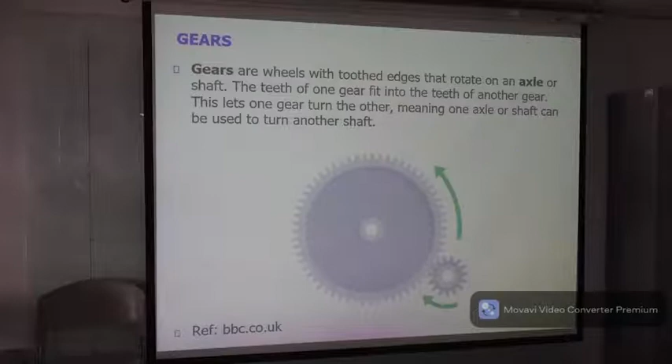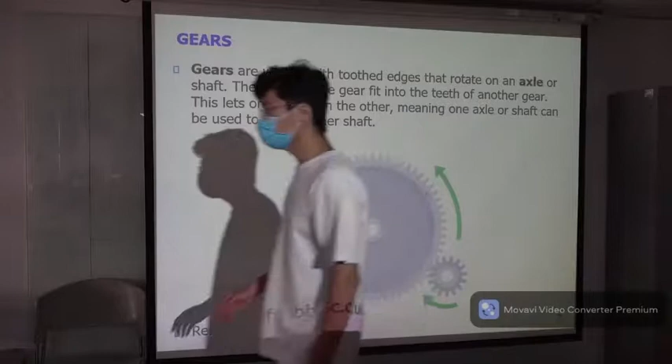Could you please read this? Gears are wheels with toothed edges that rotate on an axle or shaft. The teeth of one gear fit into the teeth of another gear. This lets one gear turn the other, meaning one axle or shaft can be used to turn another shaft.

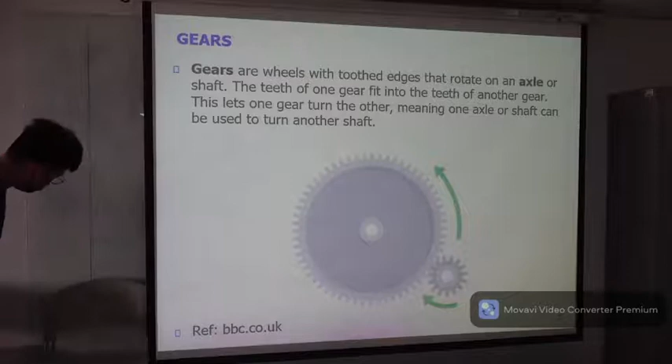Okay, gentlemen, what's the rotation direction of the big gear? Clockwise or counterclockwise? The big one is counterclockwise. And the smaller one is clockwise. Okay, yes, they are in opposite direction.

Lady, did you see the rotational direction of the gears? The green arrow shows the rotation. And are they in the same direction? No. Okay, next page, please.

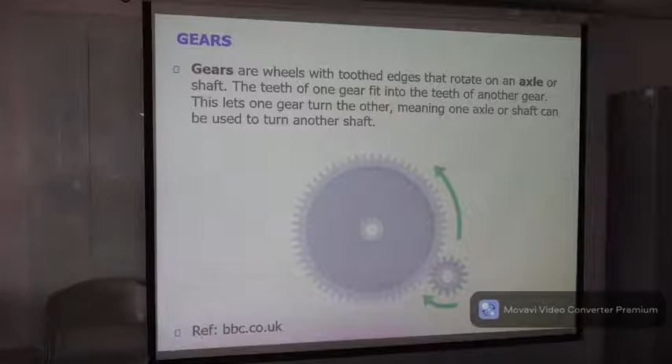Similar case is the gear transmission system - the bike. So we have a sprocket, two sprockets. They are not gears, and they rotate in the same direction.

Could you read the first point? The force acting on the teeth is identical for both gears. but their moments are different. Moments equal to force times radius.

Like if we join hands together, yes. If I pull this gentleman, do I feel the same reaction force from him? Do we feel the same force, my hand and his hand? Yes, thank you. The same as the sprocket - they experience the same force.

Could you stand up, please? So if her joint is the supporting point and you extend your arm - just one hand - so if I push a force, this is F, and this is the arm of her length. So I apply a torque to her joint. The torque is the force times the length of her arm.

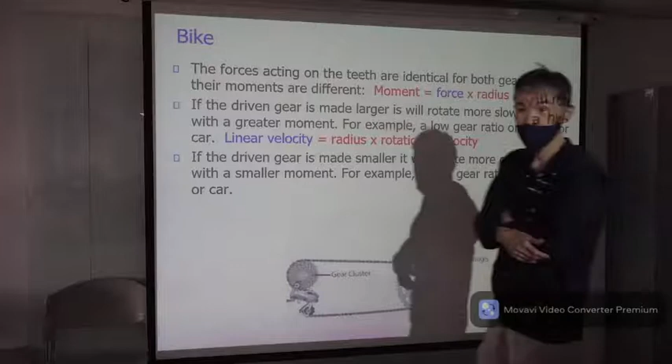Okay, sweet lady, do you follow me? The linear velocity equals radius times rotational velocity. Do you understand? Can you say that again? The linear velocity equals radius times rotational velocity. Do you follow? No.

Yeah, it's like - here is a pendulum. If I rotate the pendulum, there's a linear velocity, it will go right and left, but the angle will change. So the angle change times the length of the pendulum equals the linear velocity. v equals r times the angle change with respect to time. So the velocity of this point equals the rotational velocity times the rotational length, the radius.

Yeah, just the linear velocity - the linear velocity, the tangential velocity. Yes.

Okay, could you read the third point? If the driven gear is made smaller, it will rotate more quickly, but with a smaller moment. For example, a high gear ratio on a bike or car. The point is because linear velocity is the same for the small gear and the large gear.

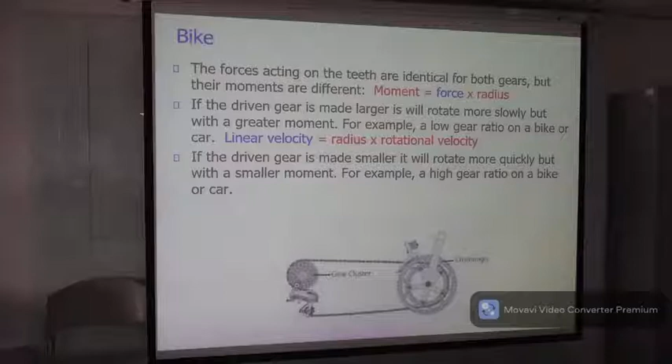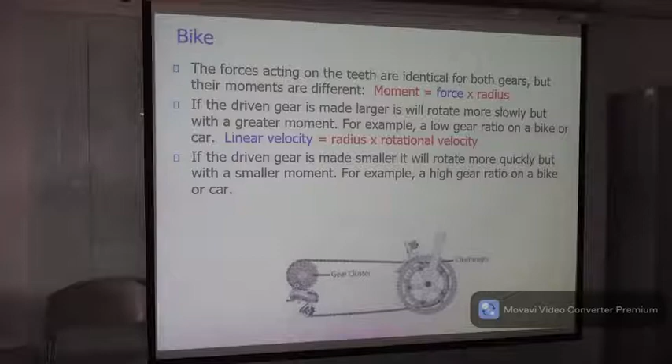So we start this week by this simple physics. Then it's like give us a good look into the future of this week.

Right, so everything is logical. Yes, it's reasonable. So we really like logic. If everyone could follow the logic, isn't it a very beautiful world? Yeah, that would be ideal. Ideal world, yes, very good world. So let's try to follow the logic. Okay, I like it, logic.

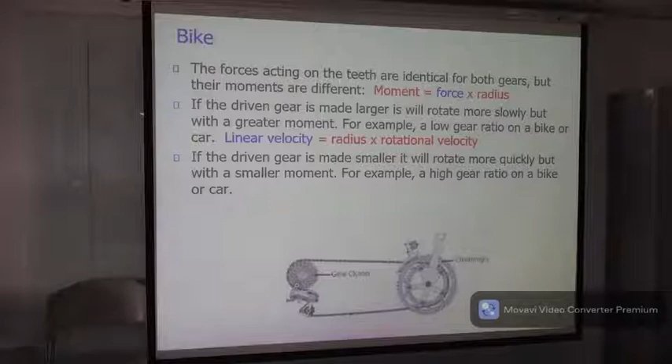Okay, do you get all the points? Oh yeah, yeah. So are you happy with it? Oh yeah. Next page, please.

So now we have an example. Could you read this example, please? Okay, a gear with a radius of 0.1 meter is turned by a gear with a radius of 0.05 meter. The moment of the smaller gear is 20 Newton meter. Calculate the moment of the larger gear.

We know the moment equals the radius times the force. They experience the same force. For the small gear, you can calculate the force applied to the small gear. But you know the force applied to the large gear is the same force, so after that you can get the force of the large gear. The problem also gives you the radius of the large gear, so you can calculate the moment of the large gear. So do you follow this logic, this thinking logic?

Yes. Okay, good. So now, everyone, please get a pen and paper or your smart pad, anything, and just calculate the moment of the large gear, please. If you can just use your mind, you don't need a pen or paper, smart pad, notepad, iPad, whatever. It's okay, good, yeah, you can just use your mind to do your brainstorming.

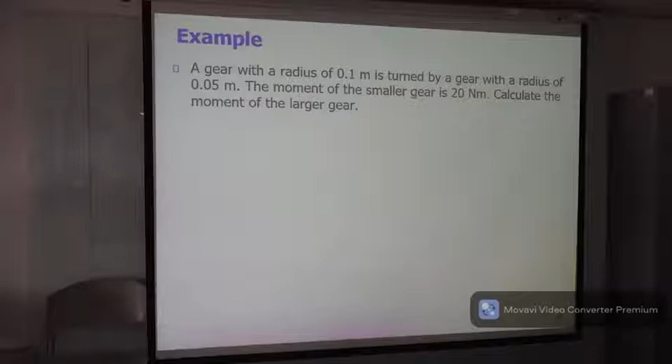Okay, please turn to the next page. Here is the answer. Do you get it? Do you get the answer right? 40 Newton meter. Yes.

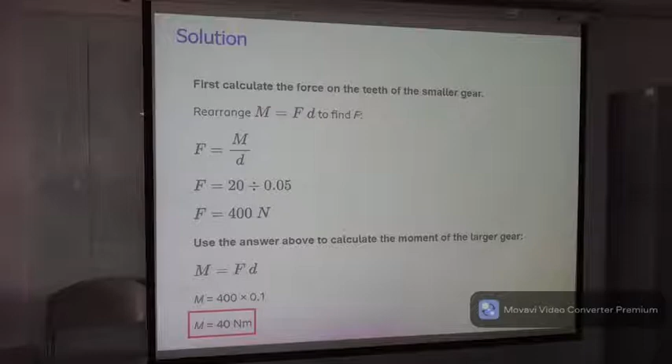For physics, we always like to have the number with the unit. So we like to have you say 40 Newton meter as the answer. Otherwise, if it is Newton centimeter, then the answer could be 4,000 Newton centimeter. So that's why I'd like you to also remember the answer should include not only the number, but also the unit. So do you get it? Very good, excellent.

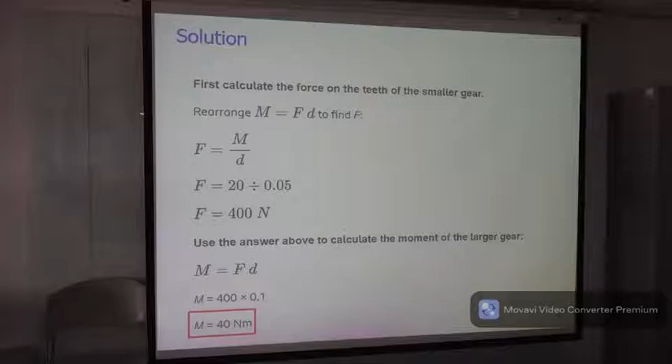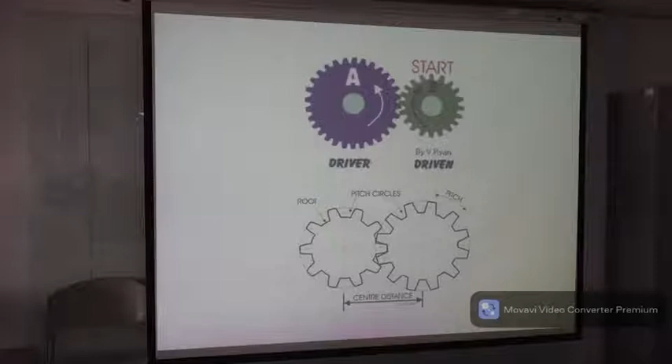Okay, next page please. Now we have the driver gear rotate in the, what's the direction of the driver gear? Clockwise or counterclockwise? Counterclockwise, yes. And what's the rotation of the driven gear? Clockwise. Right, good.

So we have a schematic plot for two gears, the bottom figure, the lower figure. So did you see the two gears? Then did you see the green color circle and red color circle? We call the green color circle the pitch circle. For the two gears, their pitch circles should be tangent to each other. And the pitch is the distance between two gears, pitch.

And the center distance, you know, is very straightforward. So do you get the nomenclature right? Do you understand all the nomenclature, all the terminology? Good, great.

So let me ask one gentleman. What's your name, please? Aaron. Aaron. So what's the pitch? From the distance from one gear to the other, the circumferential distance between two gears. Circumferential, the arc. Okay, what's your major?

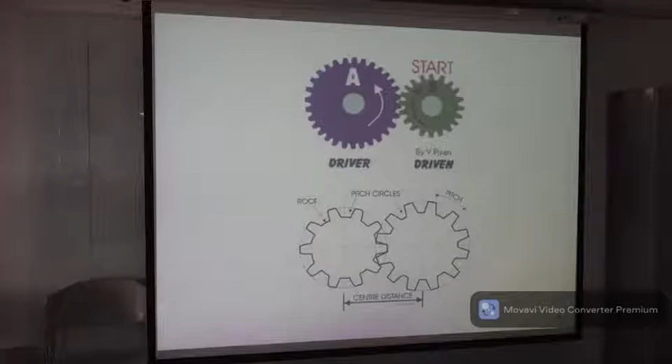Veteran. 兽医。 Huh? 兽医怎么念？ Oh, veteran. Vegetarian. That sounds right. Okay. Yeah, so you are a smart guy. Why? You should be. You are going to be an animal doctor. No? Okay, fine. Next page, please. Next page.

Okay, some introduction to gear. So, if the large gear has 24 teeth and small gear has 8 teeth, we call this a 3-to-1 ratio. So, could you read the point? Teeth number of driving gear divided by teeth number of driven gear, we call gear ratio. So if you see this symbol, this is number. Number. Okay. Shorthand writing.

Okay. So driven gear: 3 turns moves by 24 teeth, 1 turn moves by 24 teeth. For the small gear, it's 8 teeth, so 3 turns equal to 24 teeth. For the large gear, it has 24 teeth, so 1 turn moves by 24 teeth. Do you get it? Yes. They should move with the same number of teeth, because their pitch are the same. For the small gear and the large gear, they have the same pitch. So that's why small gear should rotate 3 turns, and the large gear only rotate 1 turn. Isn't that beautiful? Yes, it's very beautiful.

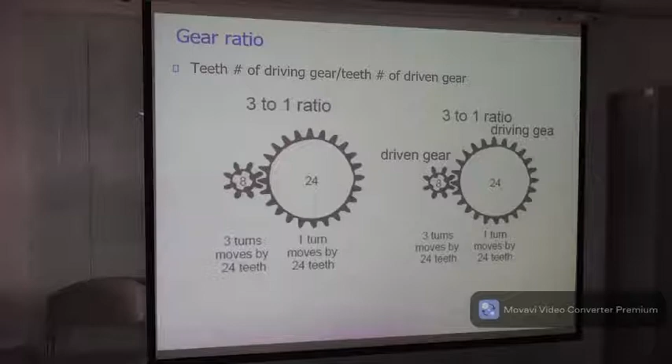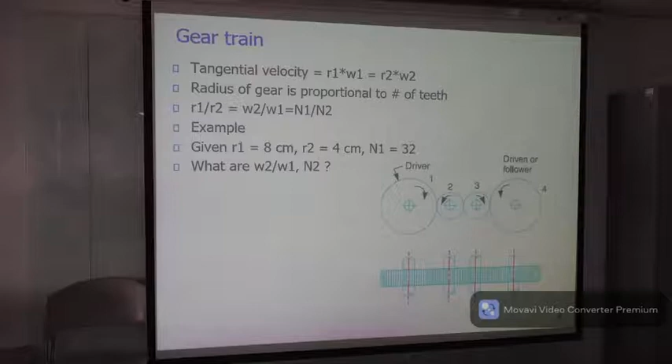No, but I want to know what does W mean. W is the radius of the gear. So, but R, oh, sorry. W2 is the velocity, and R is the radius. Okay. So, radius ratio equal to the inverse of the rotational speed ratio. R1 divided by R2 is 2. So this is 2 and this is 16. Yes. Okay. Next page, please.

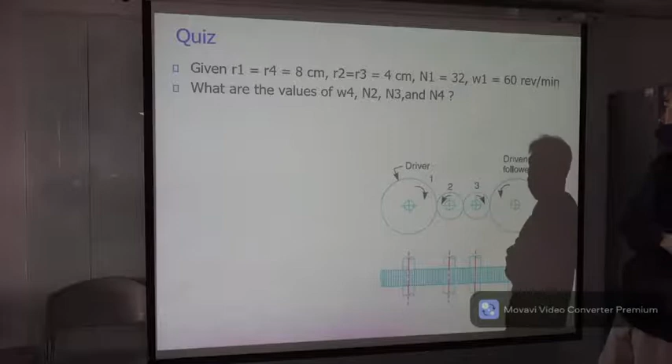Now, another quiz. So please do the quiz, everyone. W1 equal to 60 revolutions per minute. 60 revolutions means 60 turns. And 1 minute is 60 seconds. So revolutions means turns.

Very good. We almost got all students in the classroom. We got 22 students in the classroom, and the registration number is 24. So we only have 2 students absent from the class.

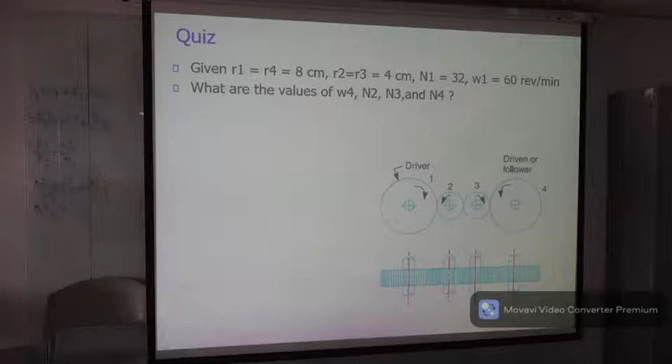60. Okay. So raise your hand if you have problem getting the answer. Okay. Everyone got it right. Next page, please.

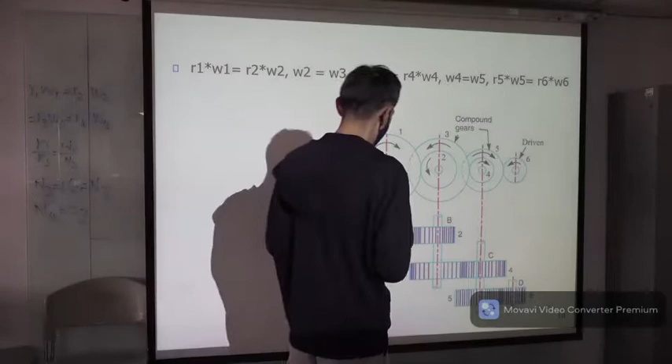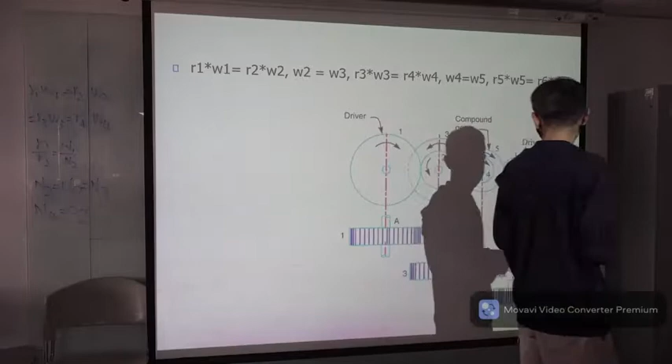Okay, so here we have some gears arranged in this way. We have driver, we have driven, and we have two gears between the driver and the driven gear. And we have the relation. So because R1 and R2 contact with each other, we have R1 omega 1 equal to R2 W2.

And R2 and R3, they are attached to each other. They are in one assembly, gear 2 and gear 3. See, they are bound to each other. So they got to have the same rotational speed. That's why we write W2 equal to W3. And gears 3 and 4 contact with each other. So we have R3 W3 equal to R4 W4.

But gear 4 and 5, they are in the same assembly. They are bound to each other. So that's why W4 equal to W5. And gear 5 and 6, they contact with each other. So we can write down R5 W5 equal to R6 W6. Right? Yes. Okay. Do you follow this? Do you have problem with this figure? No. Okay. Next page, please.

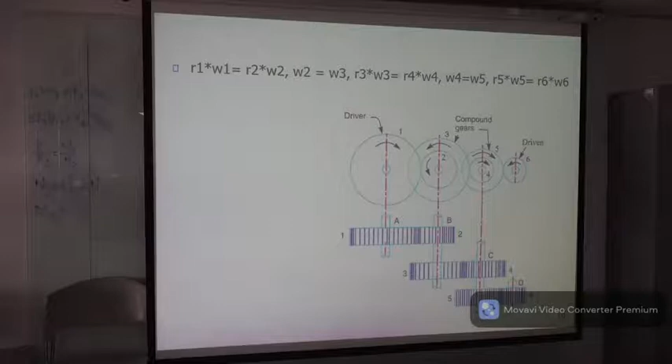So now we have a quiz for you to practice. Please calculate W6, the rotational speed of gear 6, given the condition. RPM means revolutions per minute.

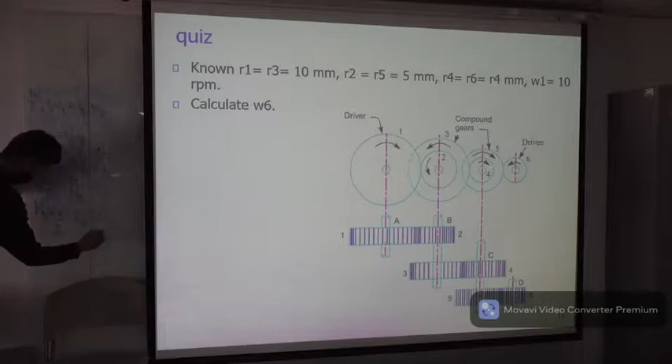So 10 times 10, 100, divided by 5 equal to 20. W2 is 20, W3 is the same, 20. Then if W3 is 20, W4 should be 50. W5 is 50. So 250 divided by 4 is 62.5 RPM. Okay?

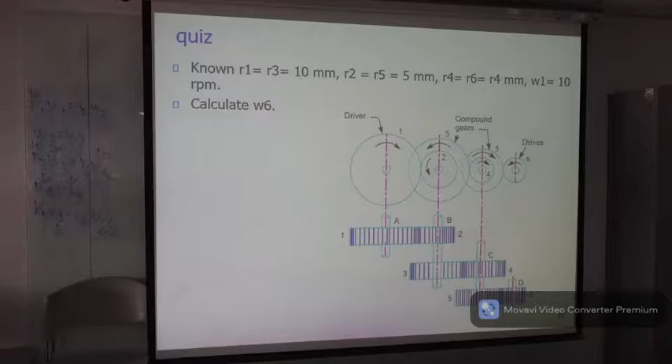Okay, so now do you understand why? Yes. It's 62.5 RPM. Next page, please. Okay,

We have a term, module, for gear designers. We have module 1, module 2, module 3. It's the name for gear designers, because pi times module equals P. P is in millimeters, and there's a correspondence between P and M. P is the pitch.

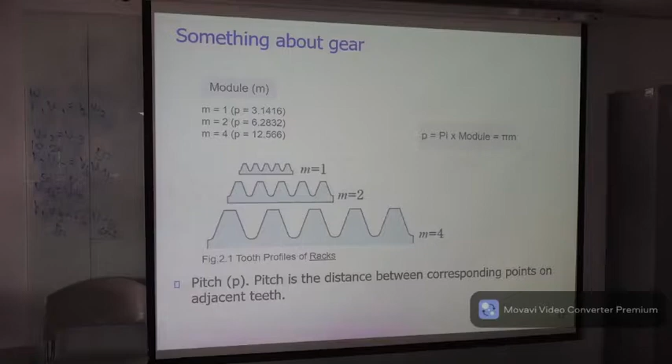So if you design a gear with pitch equal to 3.1416 millimeters, then we call the gear a module 1 gear. It's just something for gear designers to communicate with each other. Okay, so could you read the bottom point? Pitch. Pitch is the distance between corresponding points on adjacent teeth. Right. Okay. Next page, please.

So besides module, another term for gear designers to use is diametral pitch. The relation between module and diametral pitch follows the equation: module equals 25.4 divided by diametral pitch. Okay, just something for you to know. Okay, next page, please.

Okay, we have another schematic for a gear. So we have a gear, and the pressure angle is at the contact point. We draw a vertical line, and along the surface of the gear, we draw another line. The angle between these two lines we call the pressure angle. And we have the pitch, the distance between the corresponding points on the two adjacent teeth. And the angle between the surface line and the vertical line is the pressure angle. Could you read the point?

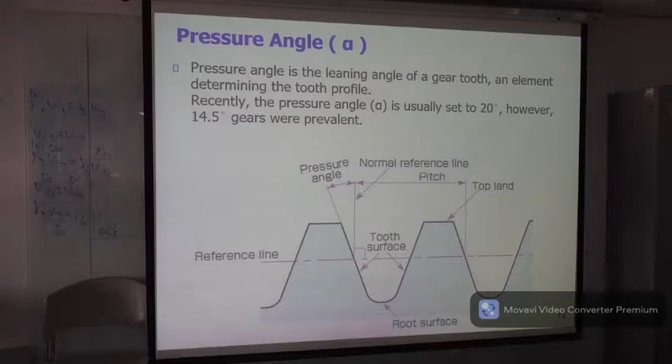The first point? Pressure angle is the leaning angle of a gear tooth, an element determining the tooth profile. Recently, the pressure angle, alpha, is usually set to 20 degrees. However, 14.5 degree gears were prevalent. Oh, okay. So some use 20 degrees as the pressure angle, others might use 14.5 degrees. It's a standard for people to use. All right, the boring stuff. Next page, please.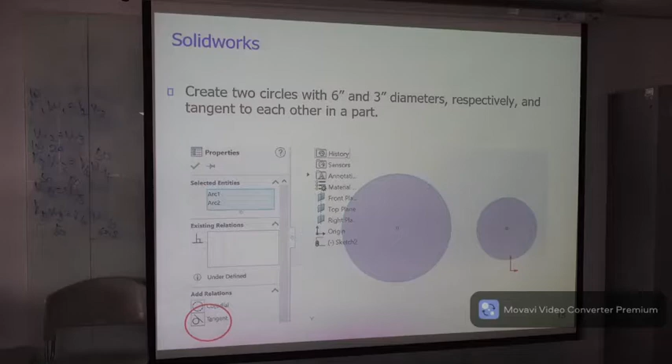Now, it's the fun part, for you to draw two gears and do the gear rotation simulation. I will ask the TA to do the SolidWorks to show everyone the steps. Okay, TA, your turn. SolidWorks. So everyone please watch the TA do the simulation once. After that, you can follow the steps in the PPT to run your SolidWorks.

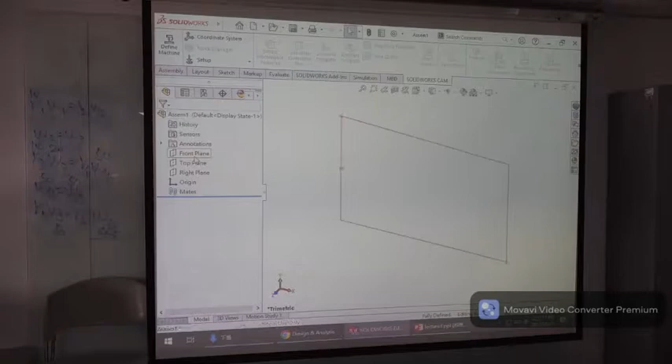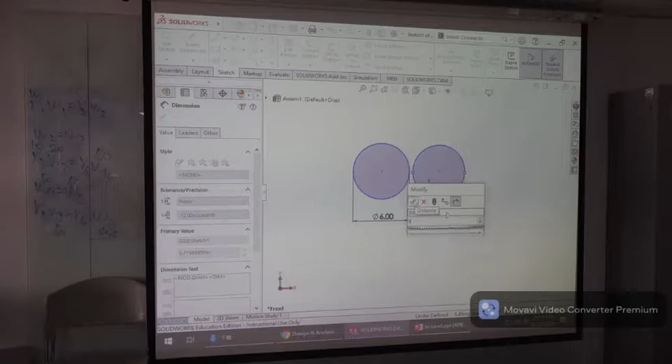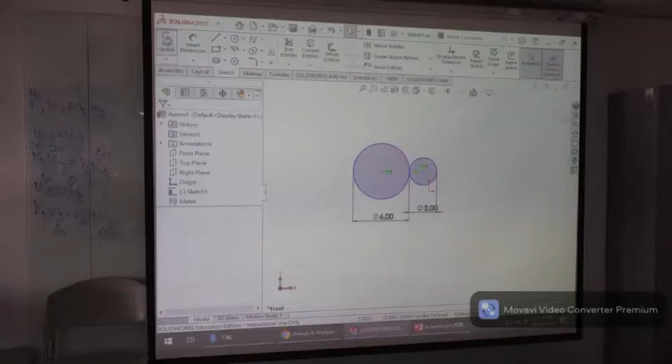We select a surface to draw two circles first. Okay, please go ahead. And we will make the two circles tangent to each other, but we need to assign the dimensions. Then, yeah, make them tangent to each other. After that, we will create the gears from our data bank.

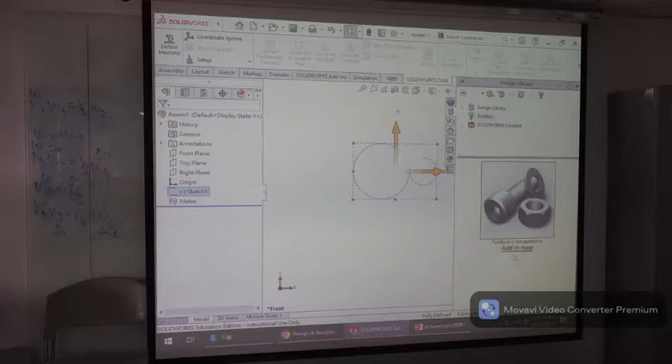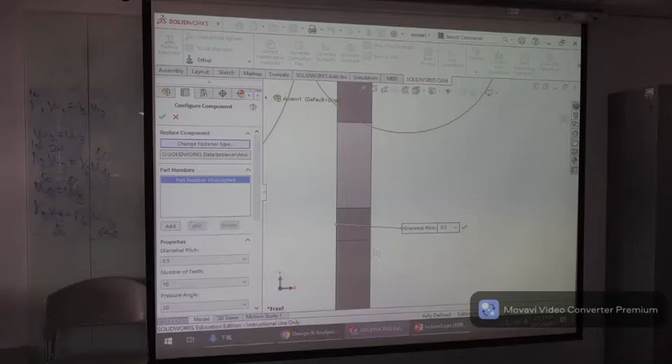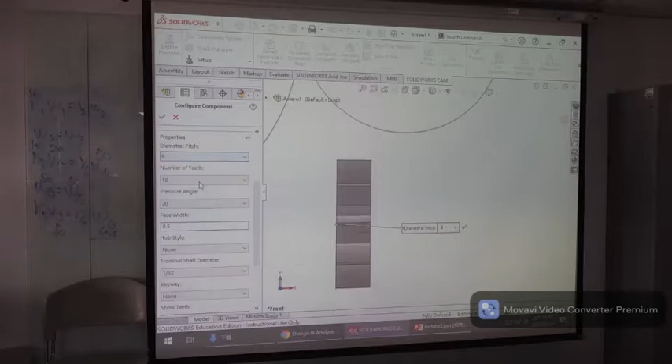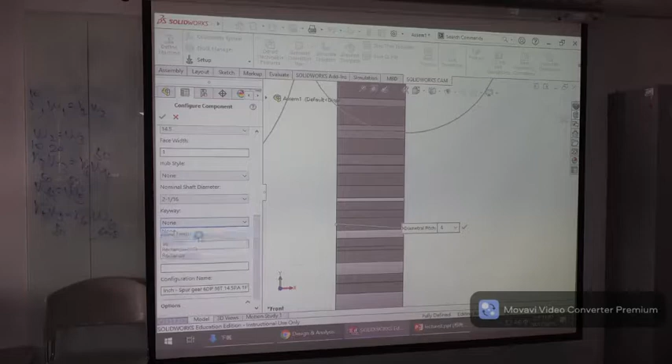Because we need a toolbox, we need to get the toolbox first. We use the simple one, spur gears, normal gears. The two gears have the same diametral pitch.

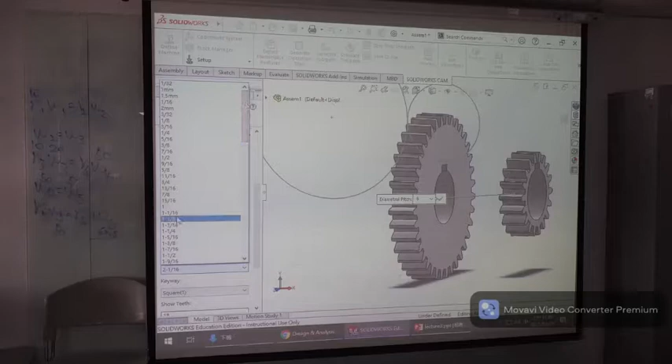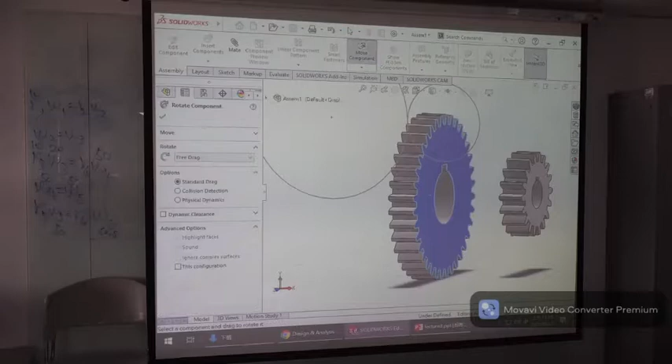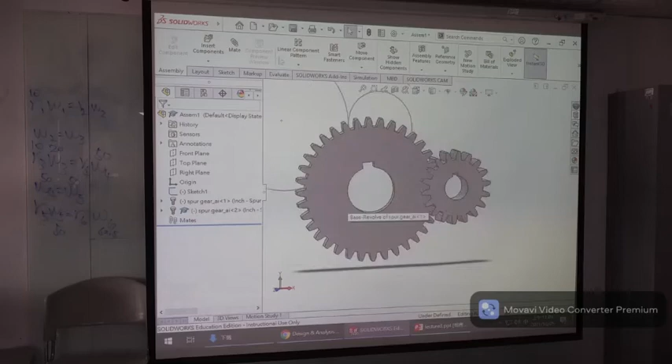After that, we need to rotate the gear to be in the same surface as the two circles we drew previously. You need to make the part float, otherwise it is fixed. We can use the mate function to mate the surface of the two circles with the surface of the gears.

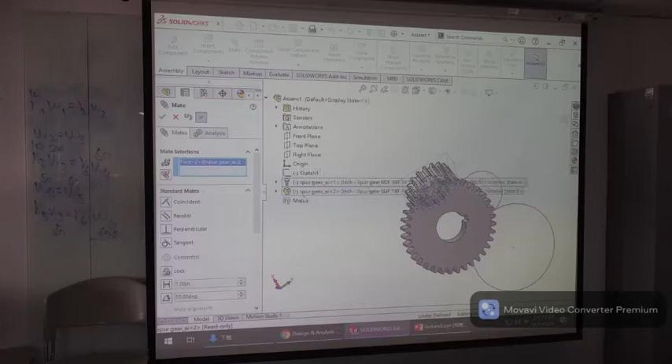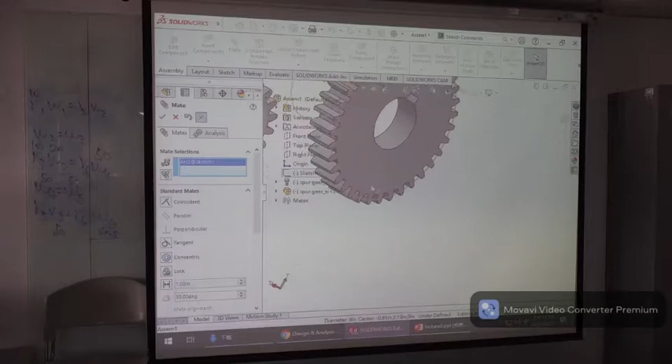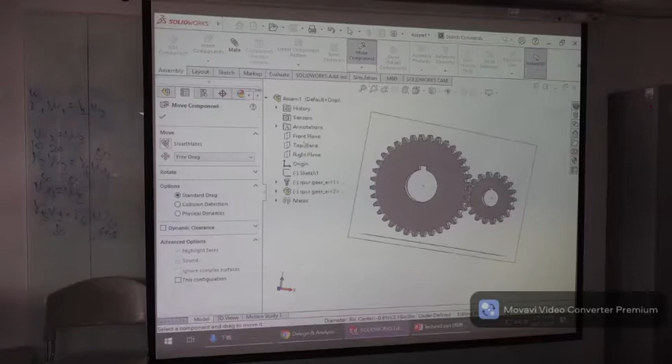Then we make the circles concentric. That's why we drew the two circles first: it's easier for us to align the two gears to match each other. Yes. You need to rotate a little bit, otherwise they will interfere with each other. So yeah, very good.

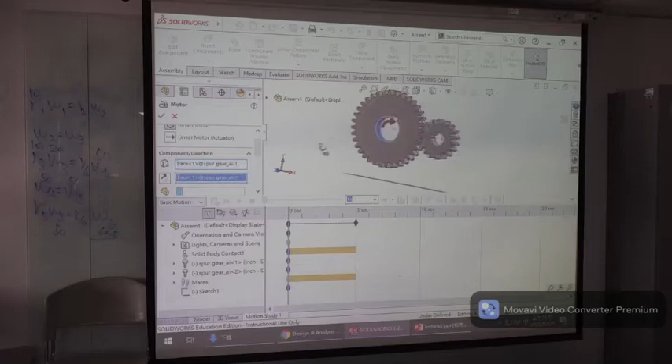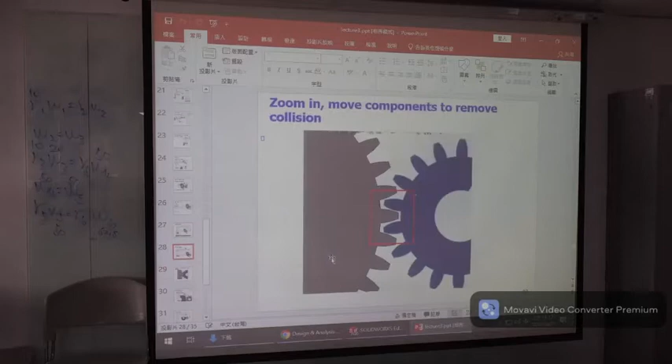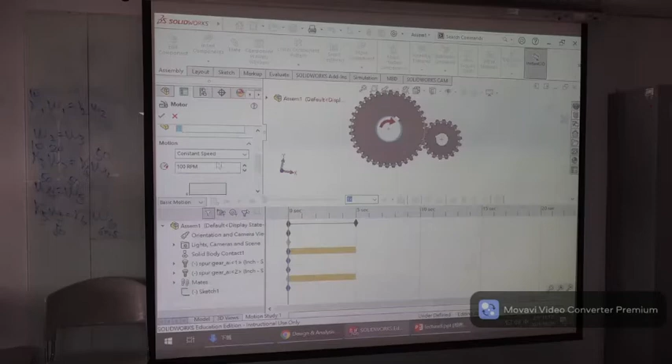Then we do a motion study. We give a rotational speed to one gear to drive the other gear. It's like we put a motor to drive the big gear. So we give the RPM value. We calculate. Okay, pretty good. So this is a motion study. And after that, we can do animation.

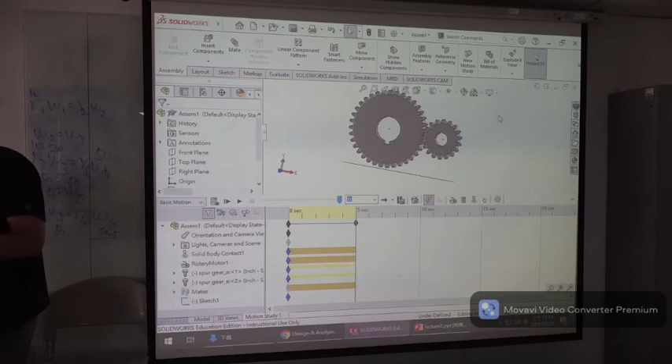And for the final project: in this class we have no exams, no homework, nothing, but we have one final project. The final project is in the final week of this semester. You will select a topic. You will